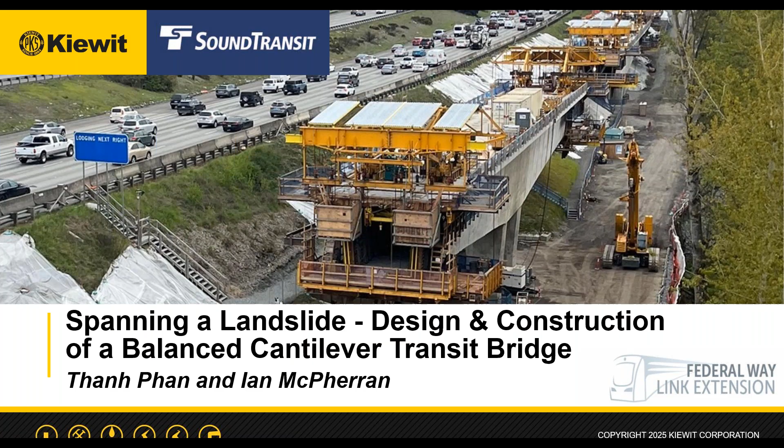For today's presentation, I'll start with the project overview, and then I'll put on my geotech hat and discuss the liquefiable soil that we had to contend with on this structure. I'll then go over a few alternate technical structure types that we investigated before landing on the long span structure itself. I'll then hand it over to Ian to cover the various aspects of what we called construction-driven design, and then we'll end the presentation with some time lapses and some photos.

So let's start with the project overview. The project is called the Federal Way Link Extension Project, or F200 for short. It is located in the greater Seattle metro area and is an extension of Sound Transit's existing regional light rail system. It starts where the line currently ends at Angle Lake Station, which is located just south of Seattle-Tacoma International Airport, for those who are not familiar with the area.

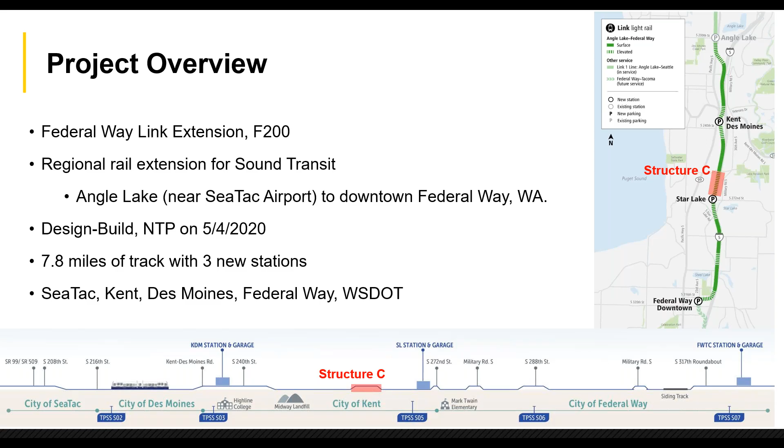The project has been delivered under the design build model. The line is approximately 7.8 miles long, and it runs mostly adjacent to Interstate 5 and terminates downtown Federal Way. This presentation will focus on Structure C itself, as highlighted in red right there. It's located in the city of Kent, and it's approximately in the middle of the alignment.

Zooming into Structure C there, the structure starts just north of South 259th Place, and the whole structure is approximately shy of 1,500 feet in length. The initial portion, which is approximately 400 feet, uses precast pre-stressed girders. The second portion, which is the focus of today's presentation, is the cast-in-place balanced cantilever structure. One thing I want to point out is the bridge, the structure itself, was designed by Kiewit Engineering, and the contractor was Kiewit Infrastructure. So Kiewit did everything.

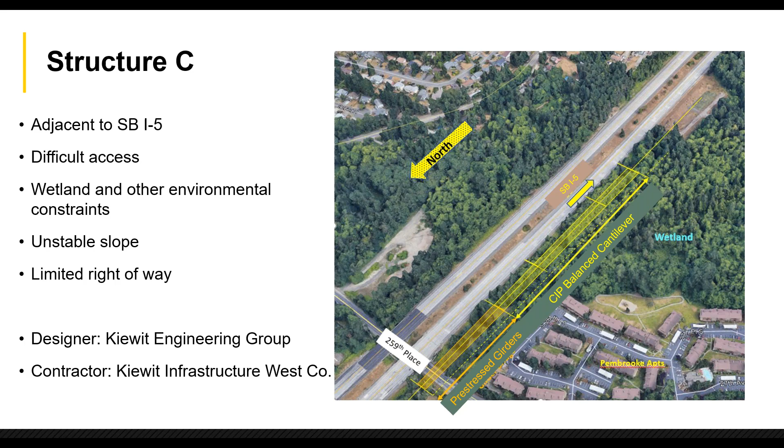So let's talk geotech for a little bit here. Taking a longitudinal section through the structure, we can see the main span is set to clear a liquefiable soil zone, which is that red layer that we're showing on the screen.

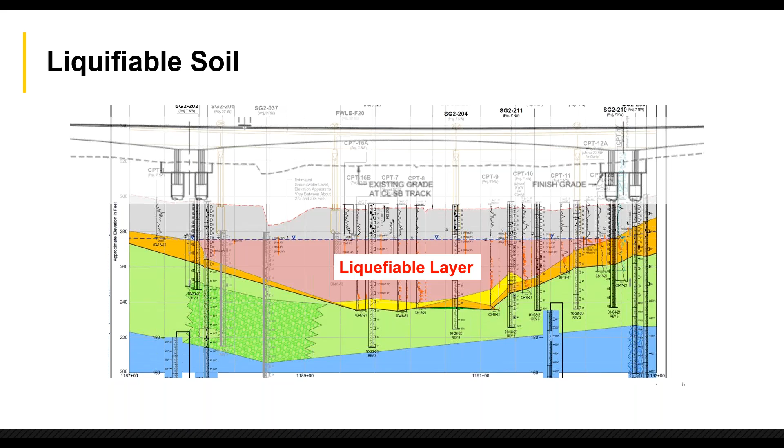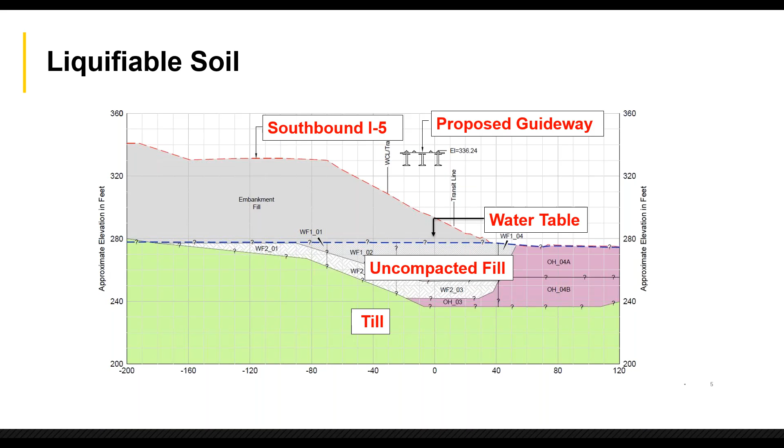Okay, so what? People put foundations in liquefiable soil all the time. So why do we need to span it? Taking a cross section through the zone, we can see the embankment on the left, which is holding up southbound Interstate 5. It's approximately 50 feet tall. The uncompacted fill layer underneath, which is the liquefiable zone shown previously, is very soft. And in an earthquake, this layer will liquefy and cause the embankment to slide downhill. In other words, we end up with a lateral spread event.

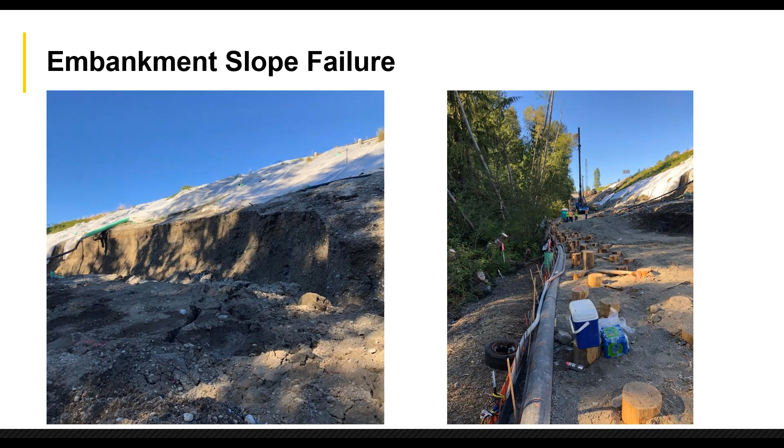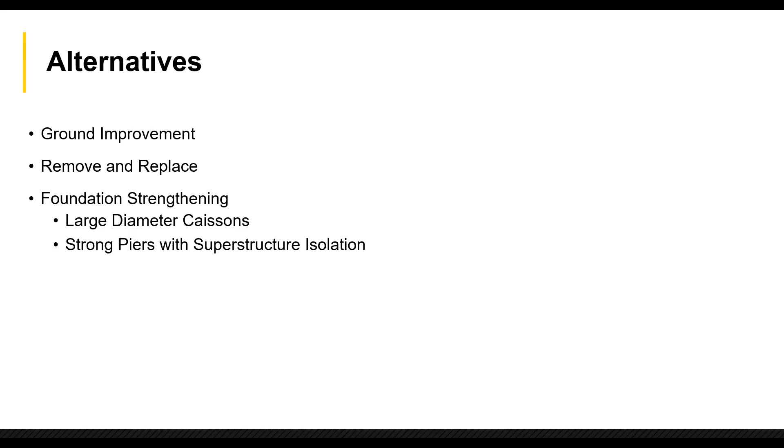So before landing on a long span structure, we investigated a few other alternates that I will go over in the next few slides. These alternates fall into three separate categories. First is to improve or strengthen the existing ground. The second is to remove and replace the uncompacted fill layer discussed earlier and replace it with competent material. The third was to make the foundation strong enough to resist flow demands. So I'll go over each one of these here in the next few slides.

For the ground improvement, soil strengthening was considered through either deep soil mixing or jet grouting. Either one of these techniques essentially pumps a cementitious slurry into the ground to strengthen it. This concept was ultimately abandoned due to various environmental and technical concerns. These techniques typically create a lot of spoil that must be contained. These spoils are full of cementitious fluid and other environmentally sensitive materials.

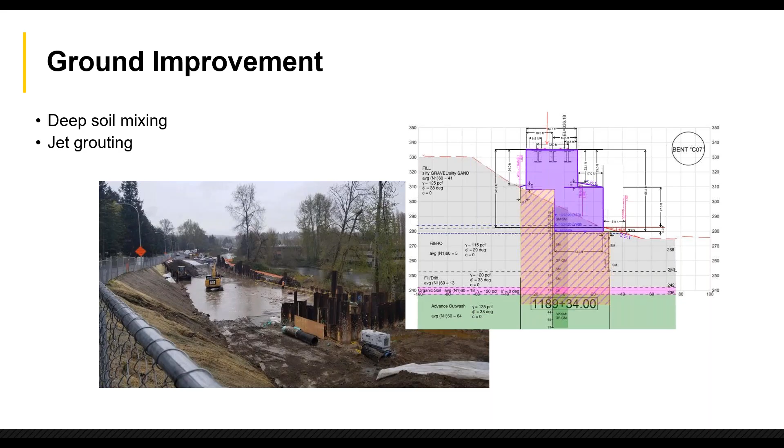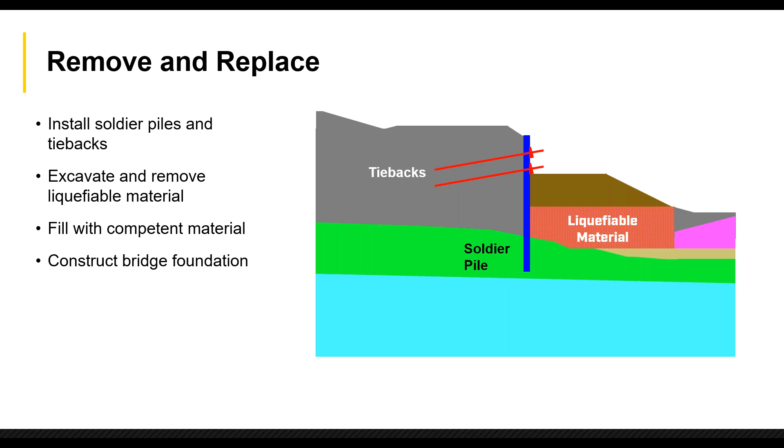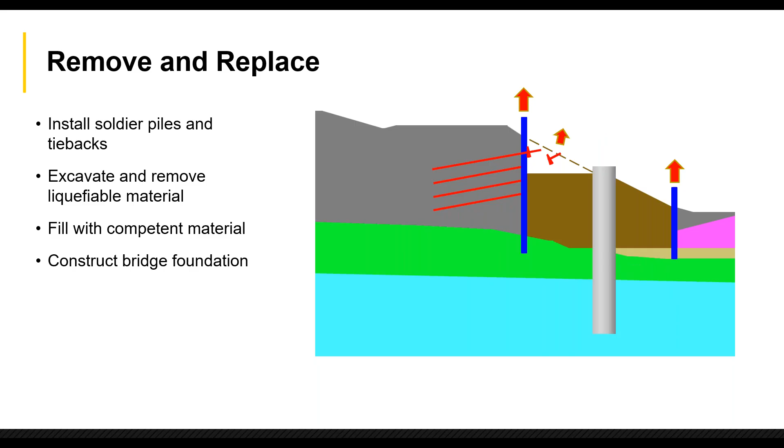So the next concept was to remove and replace. The idea was to excavate, remove the liquefiable soil material, and fill it back up with competent fill. First, soldier piles and tiebacks would be installed to temporarily support the existing embankment. Next, we would excavate out and remove the liquefiable material, then fill it back with competent fill to build a bridge foundation.

Taking a longitudinal section through this concept, these remove and replace zones would be approximately 250 to 300 feet apart. The structure type for this would have to be a steel plate girder of sort. This option was really abandoned due to the temporary excavation, and the construction zone having to be extended beyond the transitway limit or right-of-way limit into I-5.

This requires revision to the agreement and a host of other permitting challenges. Furthermore, this construction would require large cranes and big laydown areas. It's very challenging in a narrow right-of-way corridor with the existing slope. Shoring towers would be needed on the slope and would pose additional risk due to the soft embankment.

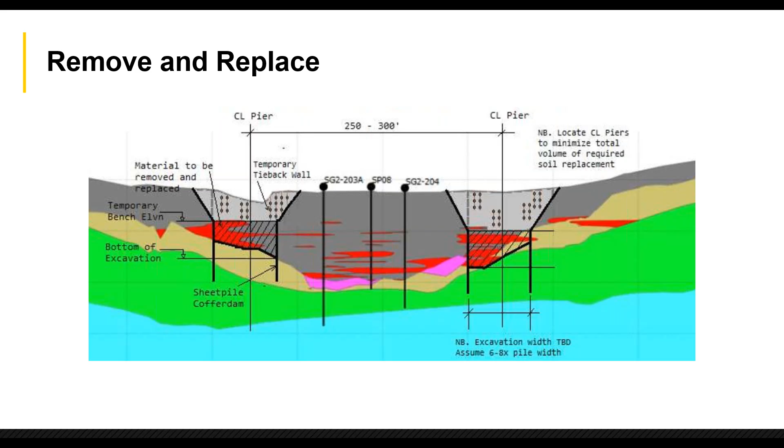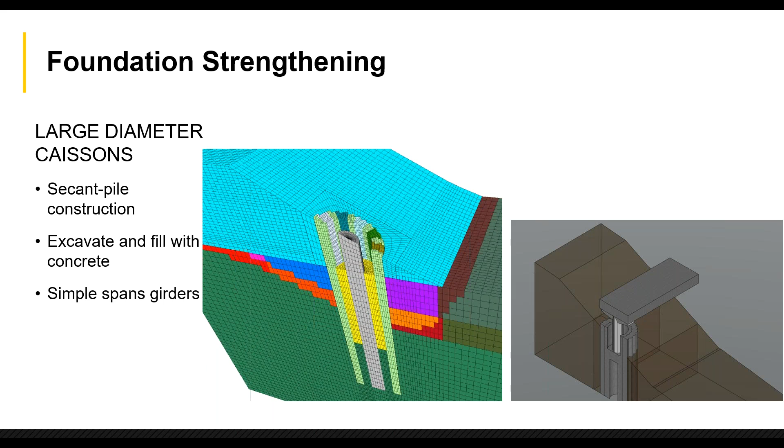Two of these piers would be placed inside the liquefiable soil zone with approximately 170-foot spans. This option was abandoned because the landslide load would grow with the large circular diameter, so you end up chasing your tail with larger demands and larger capacities. There are also a lot of construction risks with this - these secant piles would be very, very deep, and the shafts may wander as you build them.

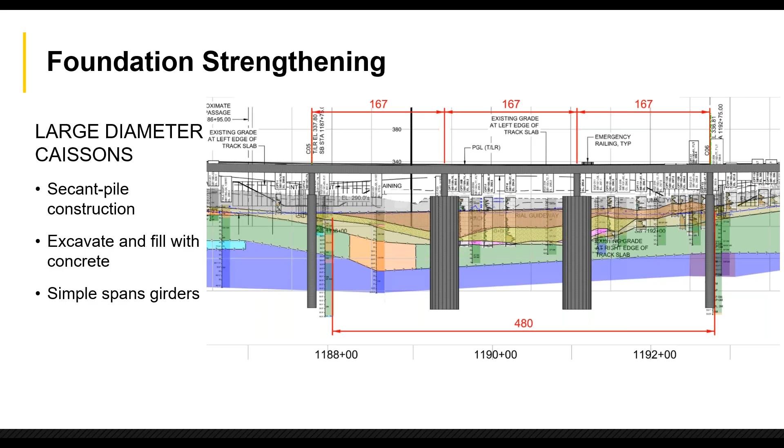We took the strong pier option through final design and released it for construction, but with other alternates it all goes back to the unstable slope. The equipment was mobilized to temporarily stabilize the slope to provide construction access, and the slope slid. The ground is simply too soft.

So when this happened, we, in coordination with Sound Transit, went back and took a step back to assess our options, and it was collectively determined that the long span balanced cantilever structure with top-down construction to span the slope was ultimately the right path forward.

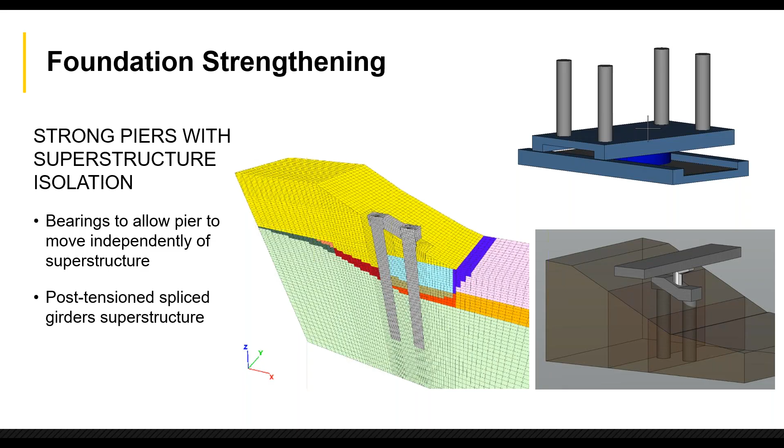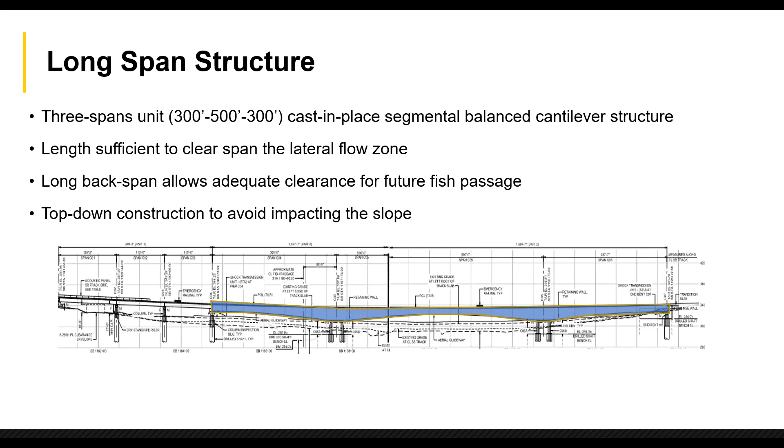So let's take a closer look at the detail of the structure. The segments are set to be 11.5 feet long for the deeper segments and 15.5 feet long for the shallower ones. These segment lengths were set on purpose based on the capacity of an existing set of form travelers that Kiewit already owns, which Ian will discuss a little bit later.

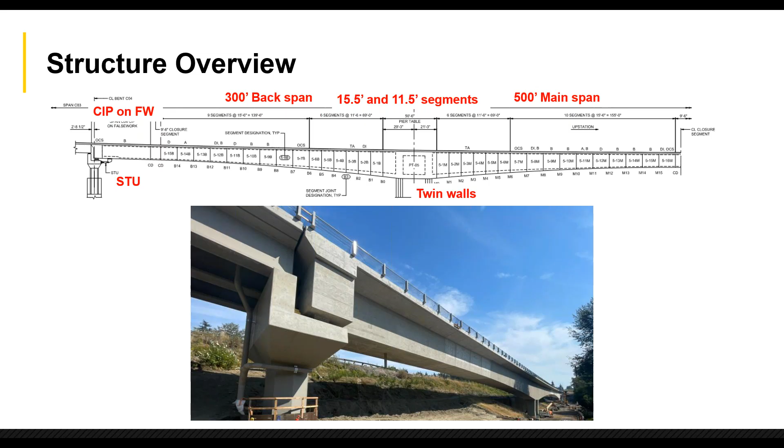At the two cantilevers, we use twin walls to address the out-of-balance moment with the half segment offset. The north column supports both the back span of the balanced cantilever and the last girder span. The south column supports a short jump span that takes the structure onto an MSE embankment. For seismic purposes, lock-up devices, or shock transmission units as we call them here, are used to engage the two end columns in an earthquake while allowing the bridge to expand and contract under thermal creep and shrinkage.

Looking at the section of the structure, the box is relatively narrow, just under 29 feet wide. It's designed to support 2 tracks with OCS in between the tracks. You can see the plethora of cantilever tendons there. The box is 25 feet tall at the pier and 12.5 feet tall at midspan.

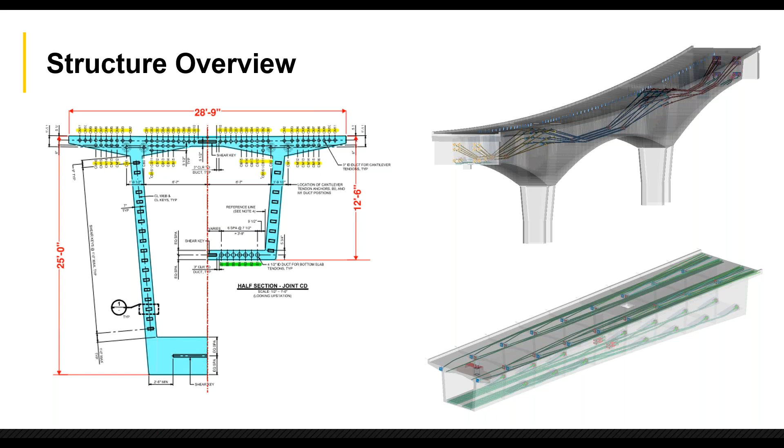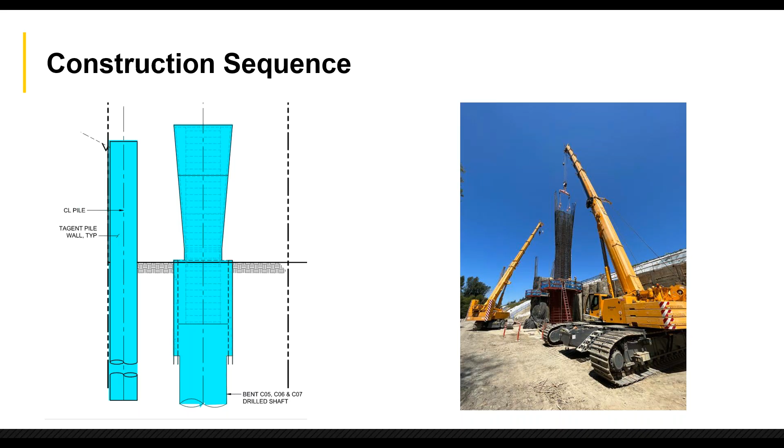The construction sequence for this structure is pretty typical to what one would see for a balanced cantilever structure. After site prep, the large tangent pile walls to hold back the embankment near the foundation are built, and substructure construction can begin. For the structure, we supported each blade column on a single large shaft. For this site, it was more advantageous to build larger but fewer foundations. This also eliminated the footing, like a shaft cap, that we simply didn't have room for. And the mono shafts provided the additional flexibility we need for seismic, given how low the structure is to the ground.

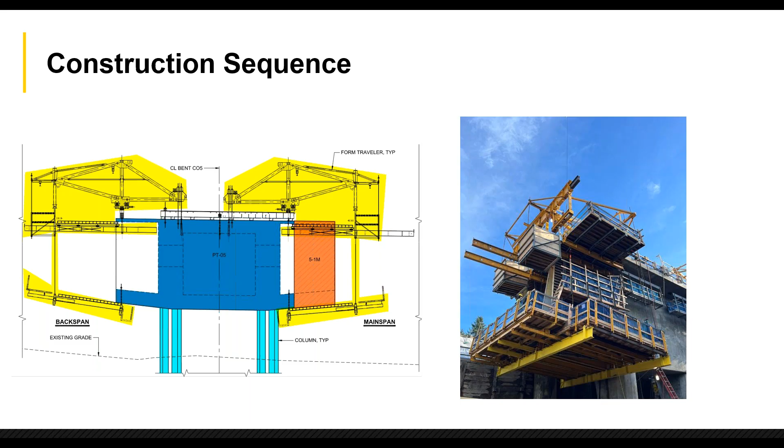After the columns are built, the pier tables are poured, and form travelers are erected to get ready for segment casting. Segments are cast in balanced cantilever fashion, alternating between backspan and mainspan.

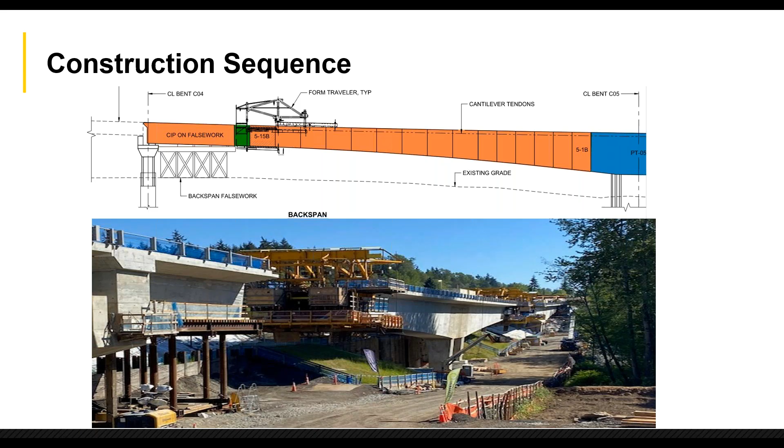For this project, we decided to make the backspan closure first. This provided the construction team with access from both the north and south side. After backspan closure, mainspan travelers are manipulated out of the way to make room for the mainspan closure itself. Prior to mainspan closure, we jacked the structure apart towards the target displacement. We calculated the force and monitored it in the field as we were doing the jacking operation. So after mainspan closure, the bridge was ready for track and systems and other related activities, and then the STUs are also installed.

So with that, I'll hand it over to Ian to discuss our approach of construction-driven design.

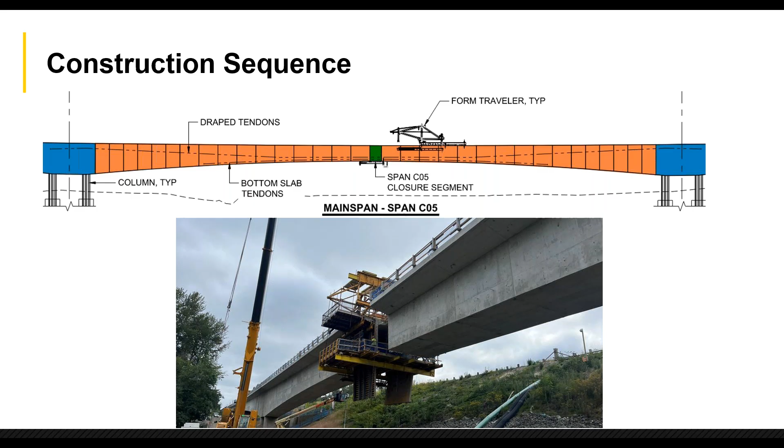Thanks, Thanh. So I'm going to spend the second half of the session talking about the integration of our design team, the KIE team, and our construction team throughout the whole process. Along the way, I'll give several examples that highlight the work getting built.

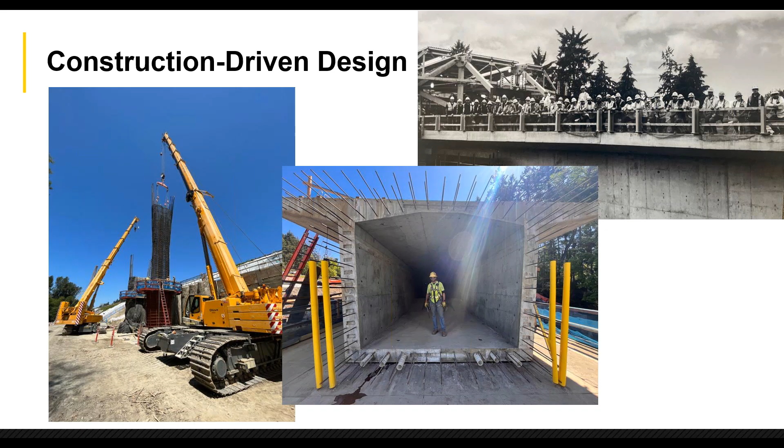As Thanh mentioned, we consider this a construction-driven design, basically a progressive design-build approach. This was a design-build project, but there was a change in the middle of it, and it became progressive, where we had to advance design and keep construction going. This project delivery method is becoming more popular in the industry, and just recently living it, we really saw a lot of success in the design and build-out of this bridge. We're going to cover several aspects of that.

On the erection manual, nothing earth-shattering here. It's the first place we started with. The phase shown on the slide, for example, is what Thanh's group developed for the drawings, and then we advanced that with the erection manual, authored by McNary Bergeron. It gives the specific steps to set up and secure the form traveler, gave us our survey and geometry control steps, and also incorporated all the wait durations and strength requirements for tendon stressing and form stripping. With that theme in mind, we started this really early and engaged McNary and KIE all working together at the 30% design stage, with a draft erection manual that we kept advancing. This engaged everyone early and helped shape both the bridge design and a lot of the temporary structures we're going to talk about.

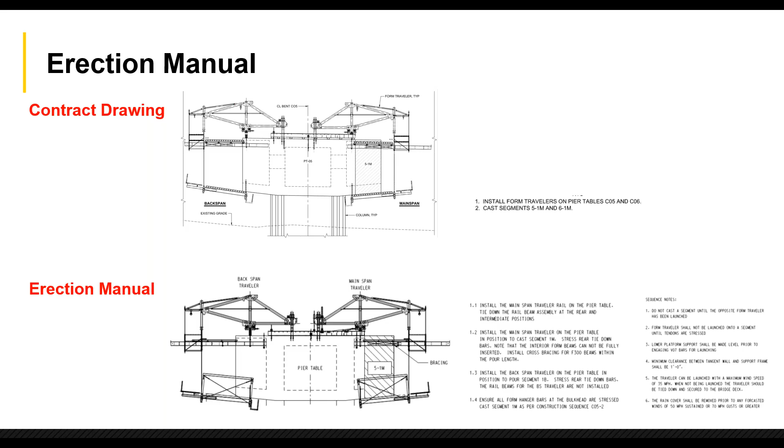One of the most significant efforts we spent integrating design and construction was the choice on the project to do integrated shop drawings for the whole segmental bridge. These weren't required by project specs, but we elected to produce them as a means to ensure construction success. We were under extreme schedule pressures, and we wanted to do as much as we could in advance of construction starting to vet out all the problems. Looking back, this really paid off in all the ways we wanted, and also a bunch of unanticipated benefits.

This started with pulling up an old example that IBT had done from the SR 520 floating bridge segmental work. We used that as a template from the last time we'd seen it done, and then innovated a little on what the whole team wanted to see.

We had the rebar supplier and the post-tensioning supplier on board, and brainstormed what all we wanted in these integrated shop drawings, what was the purpose. The goal we all set was to have each segment include a single 2D package with literally every piece of information you needed to build the segment, all in one work pack, like a 12-page pack to build that one single segment.

This included all the concrete dimensions so we could lay out all the formwork, all of the rebar information, bar lists, bend diagrams, all of the post-tensioning duct callouts and sweeps and inflection points, all of the stressing data right there, anticipated elongations, all the different layouts for embeds, traveler sleeves, rail embeds for the plinths, everything for handrail embeds, things for the closure, all of that. What that equaled was about 68 separate packages for all the different segments plus the pier tables.

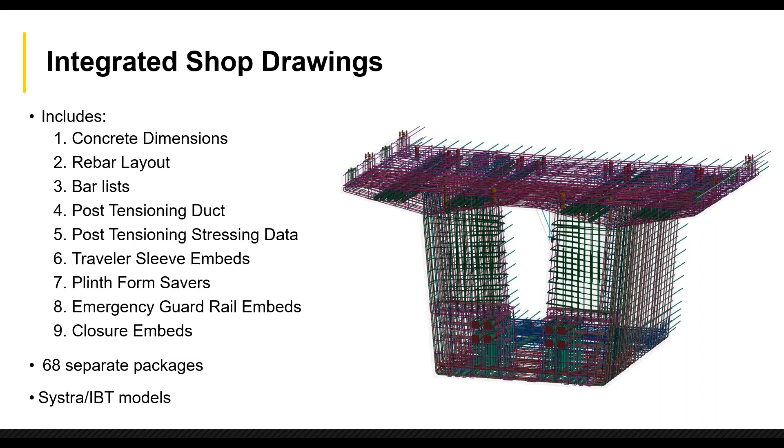The detailing accuracy was about an 1/8 inch or better, which is higher than, say, rebar tolerance for fabrication or placement.

People had the old assumption that, well, it works on paper, it works in a 3D model, but it's never going to work in the field. We found quite the opposite with the modeling that was done. We really came to trust that if the model was conflict-free, everything would fit, and we really saw that out in the field, with everybody having the same set of drawings. I think it's a testament to the modeling that was done, and really truly chasing down every single conflict.

If we did find conflicts that existed, in many cases it was found that the work wasn't built right. It wasn't that the model or the drawings were wrong - it was something that had been layered incorrectly, or some rebar that had been bent not quite right, and that was the issue versus the actual drawing set.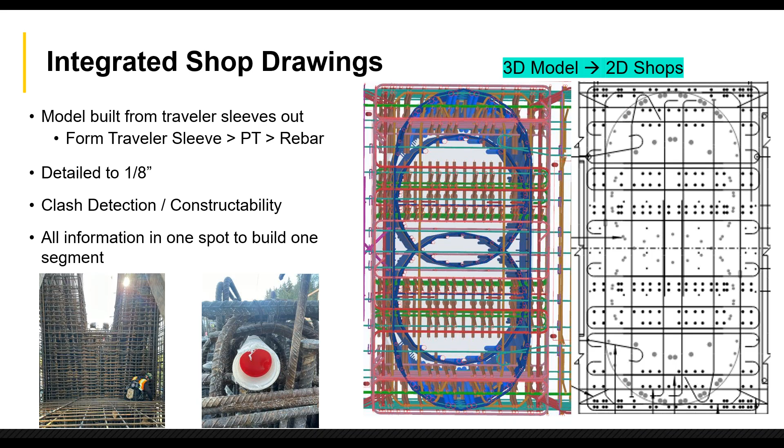These are just more examples of the 2D drawings that were produced - really easy, clean packages with all the information. Top left would be concrete dimensions, the bar lists are in there, all the PT information on the right. Again, everything in one spot for everyone to be able to use, and a really great record for the end of the project.

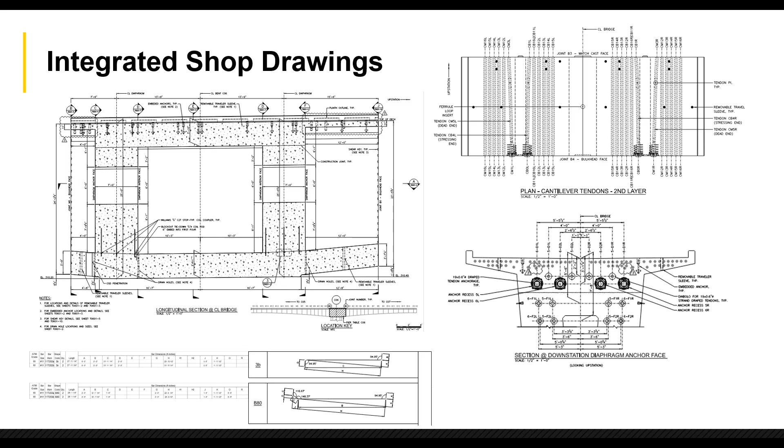After integrated shop drawings, the second most significant effort integrating the design and construction team was all the temporary works involved in the long span bridge. Typically these don't involve the permanent bridge designer, and might be done after the fact once the bridge is designed. On this technical bridge and under our schedule, the permanent designer's involvement was really critical, and it helped the success of all the temp structures working the way we wanted.

We teamed with 6 different design firms to help spread the load and get expertise in each area. The design firms included McNary Bergeron, SMG, and some others I'll mention.

Looking at the list, the big ones were falsework and formwork, equipment and access roads, and the closure jacking Thanh mentioned, all with engineered jacking beams. Our big shaft cages needed significant rebar stability checks, plus critical crane picks and worker access considerations. Many of these designers came on site or spent time inspecting their work as it was built, making sure it followed the design and helped fast track readiness for the next phase.

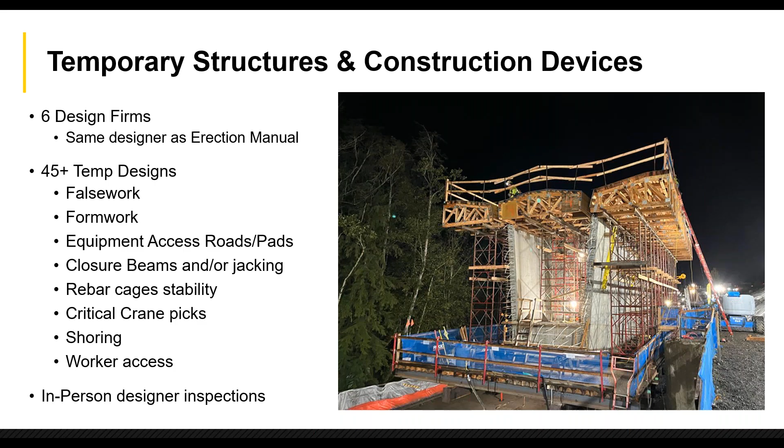Similar to the integrated shop drawings, we started all these temp designs really early. Almost every single one of them started before the permanent design was even stamped.

The very first temporary design started, and the most important, was the formwork travelers. This actually began during the conceptual design phase of the bridge. Thanh needed the traveler loading to start some early construction sequencing in their models, so we teamed with McNary Bergeron to design the formwork traveler.

For the history folks on the call, this formwork traveler was not new. Kiewit purchased it back in 2011 from an East Coast contractor, and we used it on the Tillicum Crossing in Portland, Oregon, a cable stay cast-in-place segmental bridge. Following that project, these travelers went to Hawaii and constructed many miles of segmental transit guideways on the Farrington and Kamehameha projects for HART. After those projects, they were brought back to Washington and made available for this project.

For the long span, McNary basically recreated and rechecked the old Parkin engineering design for these travelers, then identified a bunch of unique modifications needed for them to work on our segments. The travelers also had a lot of wear and tear from years of use, so we did quite a bit of assessment and repairs in the shop to get them ready.

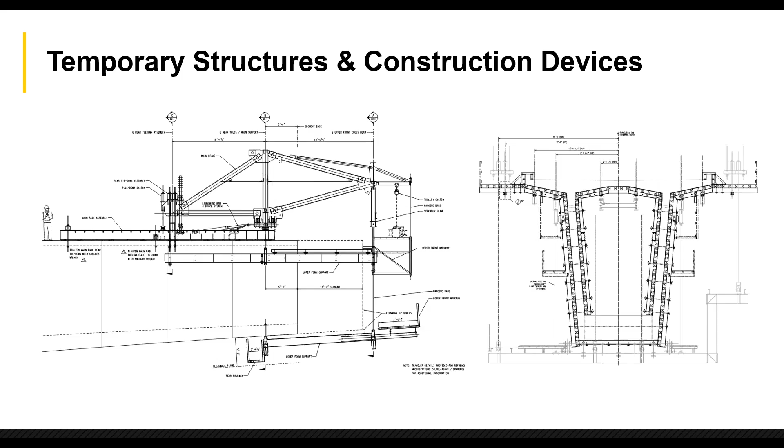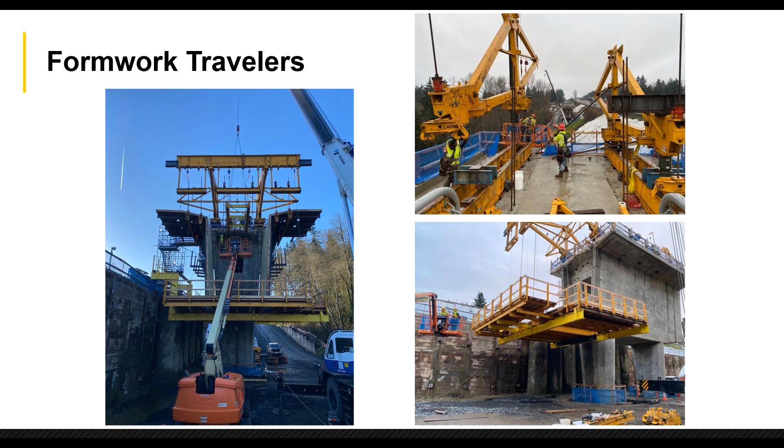Thanh highlighted in the early photos that the site was built in a really narrow footprint, wetland on one side and the freeway on the other. The integrated team strived to develop one temporary access concept that would work for all phases of construction, so the same access worked for drilled shafts as we ultimately needed for removing the formwork travelers. Kiewit designed an extensive system of soldier pile and lagging walls cut into the hillside by the freeway, plus Hilfiker wire basket walls along the wetland border, providing a 30-foot wide road along the whole side of the bridge. We also had pockets in the hillside at each of the piers.

These were really risky temporary designs given the poor soil conditions Thanh highlighted. As Thanh noted, we utilized timber piles in sections where we had the really heavy drilled shaft crawler crane loads.

Ultimately very successful, this access worked for everyone involved. It was really the premium, easiest way to get to work on all points of the work.

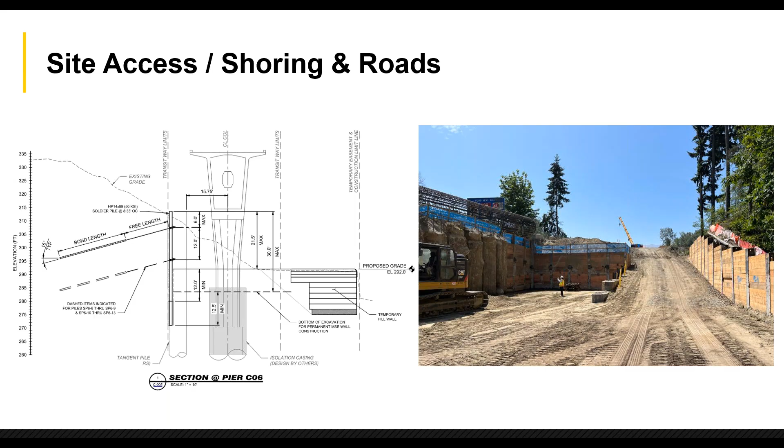Ultimately all these elements were removed and the hillside was restored to a landscaped embankment that you'll see at the end.

One of the biggest falsework systems we utilized was for the pier table, supporting the bottom and then all the formwork for the walls and the top. This was designed by McNary, and to overcome the poor soil conditions right on the outskirts of these pier tables, we collaborated on a falsework system supported on top of the permanent drilled shafts with steel posts that basically hugged onto the columns. A big network of steel grillage was utilized off these posts to cantilever, create a dance floor, and fill in that pocket in the hillside. We provided our access and then support for all the formwork to cast the pier tables in 3 different stages.

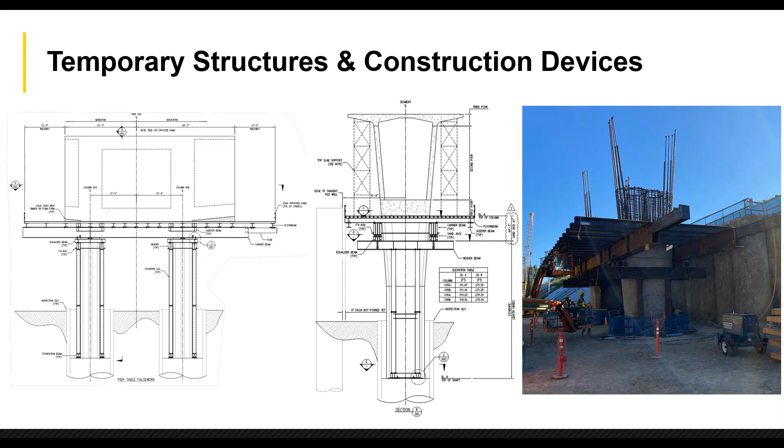In addition to authoring the erection manual, McNary also authored the bridge geometry control manual. This manual identifies and numbers the several hundred different phases of segment casting used to track and control geometry of the bridge during the build, and identifies physical target points for each segment. In total, we tracked about 248 phases from the end of column construction all the way through the closure.

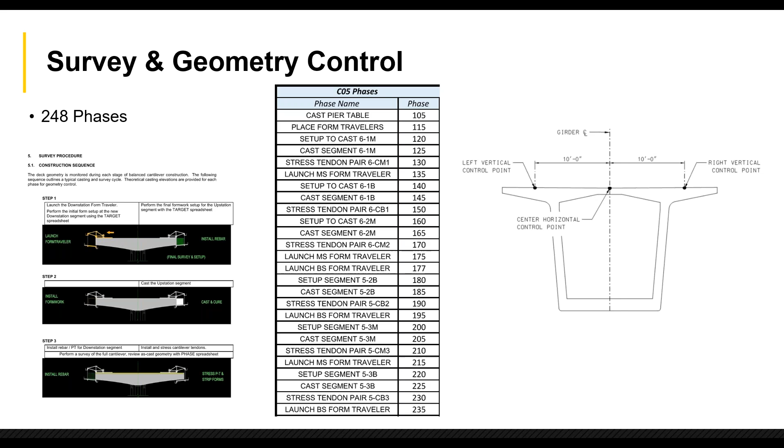The bridge geometry was recorded basically every single day during segment casting. We were casting 1 to 2 segments a week. We called the early morning surveys globals, as the surveyors with total stations would collect as-built data, station, offset, elevation across every single segment across the whole cantilever. The control points were survey nails installed in the leading edge.

We had a full-time Kiewit engineering group designer who managed the survey schedule, all the data input, and coordinated with McNary in real time to look at the results and set up the targets for the next segment. Overall, our casting accuracy to the base design was really well tracked, some of the best we've seen in terms of per spec from our experience on segmental work.

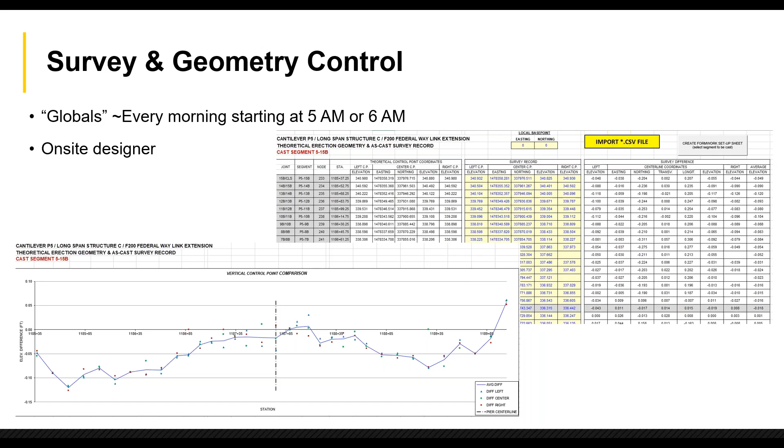Jumping topics, on the theme of starting early and overlapping with design was the mix design development for concrete. We started this about 14 months ahead of construction, right when the design was starting. Our internal Kiewit engineering group began developing different mix designs working with local suppliers. Our target mix segment strength was 8,000 PSI at 90 days for the permanent design, but our construction schedule was built around the mix's early strength gains. So we were targeting to achieve 3,500 PSI in 18 hours. That was the goal we started with.

Besides those two criteria, we also needed a mix that met or exceeded a 100-year design life for durability. Trying to chase after that perfect mix, we lab trialed about 15 mix designs with Corliss, our concrete supplier, then truck trialed about 7 of those, and finally narrowed it down to 2 different mixes. One was a type 1L and one was a type 3, both approved for use on the project. Primarily the 1L was used for all the segment casting.

Ultimately, we achieved our goal, getting a really consistent 3,500 PSI in 18 hours, which allowed us to proceed with stressing the post-tensioning and then moving the traveler. So overall, huge success. Our mix design did not let us down in terms of our tight schedule.

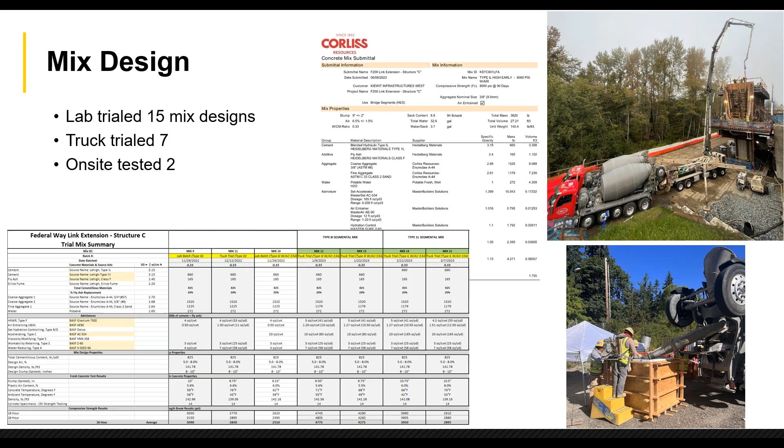Along the same themes, the concrete is the thermal control that goes with it. Our same group does some great modeling to look at this. With this high performing, high early strength concrete mix came a ton of heat generation during the curing process.

The team developed a bunch of models and looked at the different segment pours, especially the pier tables with some really thick elements on the slabs and diaphragms. These looked at varying insulation on the formwork, varying ambient temps, different concrete delivery temps, all modeling to see where we were versus the spec required max heat, which was 185 degrees. Many of the models predicted we would come dangerously close or exceed that max.

So we started with modeling the introduction of cooling tubes, cold water cooling tubes throughout the pours. To implement this in the field, we put together a cold water system consisting of an industrial water chiller, a big reservoir tank, a big pump, and a network of manifolds with clear PEX pipe running in a grid pattern.

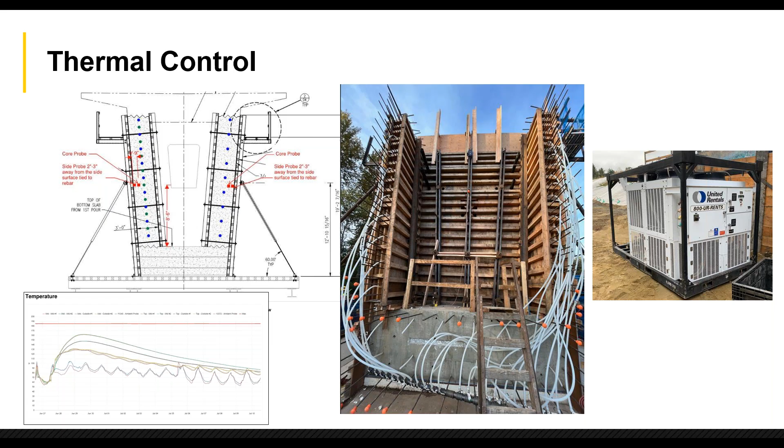The graph illustrates an output from the exact system we used for thermal tracking. Several days of the cure period where you can see the concrete peak and then cool, staying below our max temps with use of the cooling system.

Unlike many projects that get designed with a generic PT system, we selected Schwager Davis early on to get maximum input and efficiency on the design and jumpstart all the integrated shop drawing work. This worked really well in terms of having all their CAD files, knowing all the materials, having all the exact specific dimensions to run everything and come up with a conflict-free segment design.

Many unique details were developed along the way to lead to successful PT installation, down to details like where we routed the grout tubes, which in this case were routed up into the bridge curbs, really helping prevent water from getting in the ducts during construction.

One additional collaboration element was that the EOR Thanh's group performed the tendon elongation calculations, something that may typically be assigned to the PT supplier. Thanh's group used the Midas models to output the elongations, McNary used their model for the erection manual, and then SDI reviewed and did a second check.

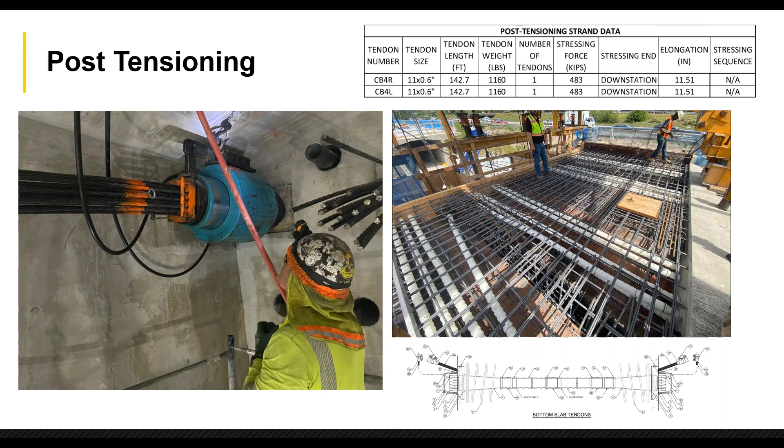The final proof of the integrated design and construction, and the final big lift, was the segmental closures that Thanh mentioned. These had really tricky phasing and staging of every single task - lots of temporary works, formwork, jacking beams, portions of the traveler remaining behind, permanent design assumptions for all the alignment forces, and finally all the continuity tendons and bottom slab PT stressing had to be sequenced and done perfectly.

We really started this closure planning back in the design phase. We optimized it several different times, saw issues where it was going to mess with our schedule, and changed it several different times, ultimately finding a pretty good solution.

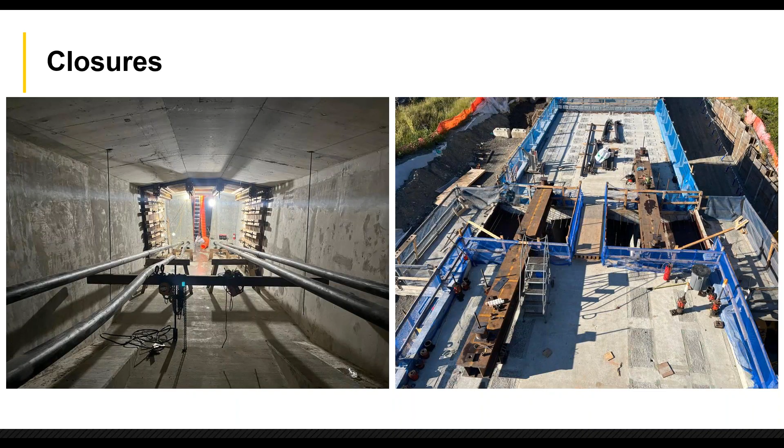I've said it a bunch of times now, that design integrated with construction, and it sounds great. It sounds like it could probably happen remotely in today's market, but what really made it a success here was that it happened with a ton of folks on site at the bridge. We had a lot of design folks there day to day, from geotech engineers viewing all the drilling operations, to staff supporting the superstructure rebar, the PT, and geometry control. We basically had designer presence on site the whole time.

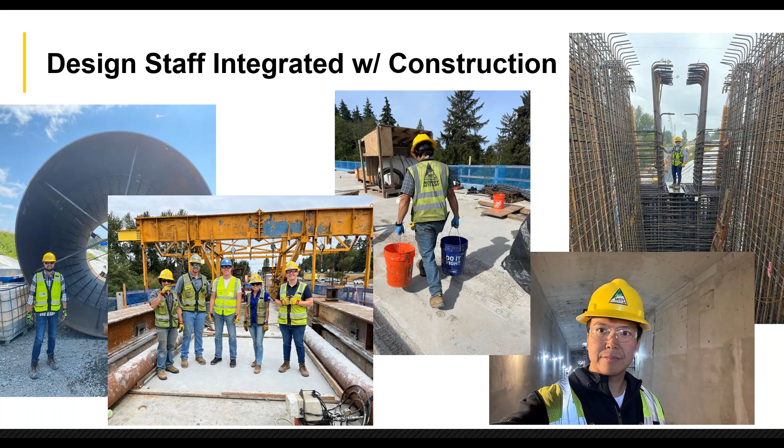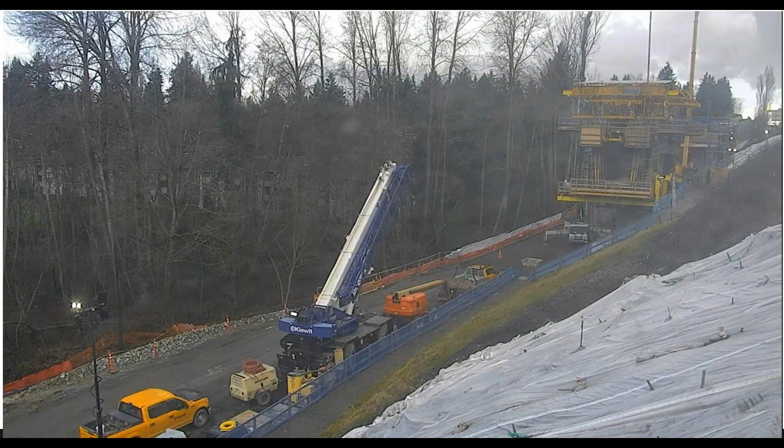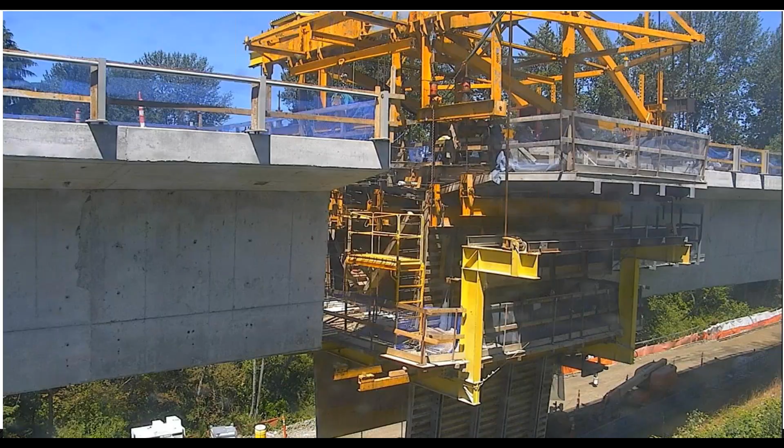We have two time-lapse videos for you guys. This is of the pier table completed with the traveler erected. It jumps out towards the mid-span closure, then one of the travelers coming off and the mid-span closure being cast.

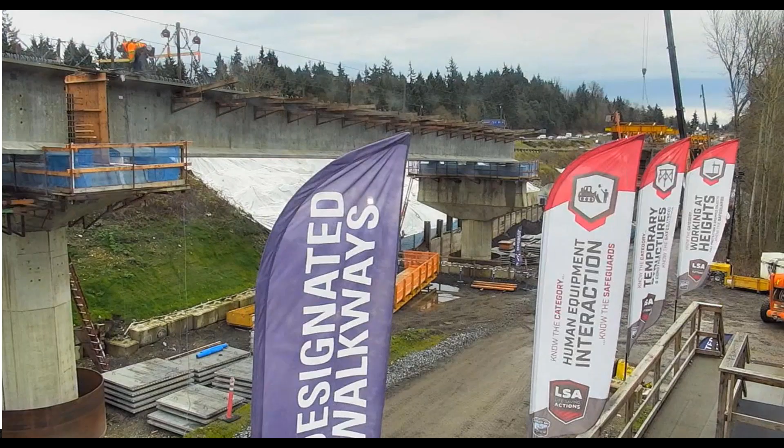And then this is a video that starts with some of the pier tables again from a different perspective. It shows the backspan being cast, a small section that we didn't talk about that was cast on false work, and then ultimately the backspan closure occurring before the midspan.

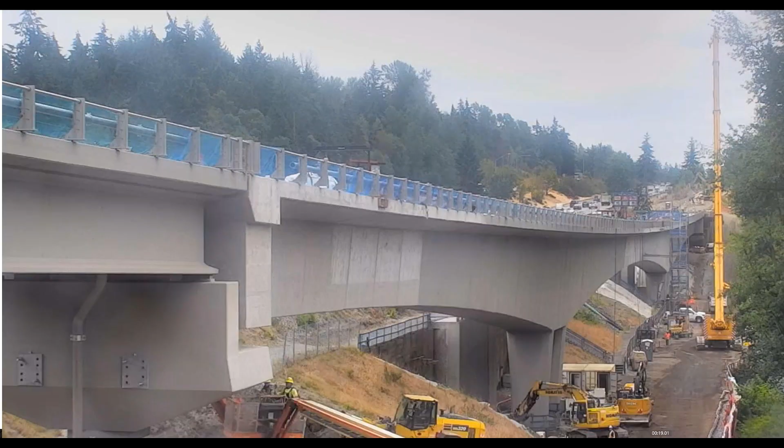Overall, really challenging project with all the changes that Thanh talked about, all the geotechnical risks and setbacks that we had — really had a lot of problems to overcome. But the selection of the long span, and the integration of the whole design team, construction team, everything we mentioned on all those topics, ended up allowing us to finish the project actually several months early, and finishing within budget. So overall, kind of a success across the board. We're happy we got a chance to talk about it.

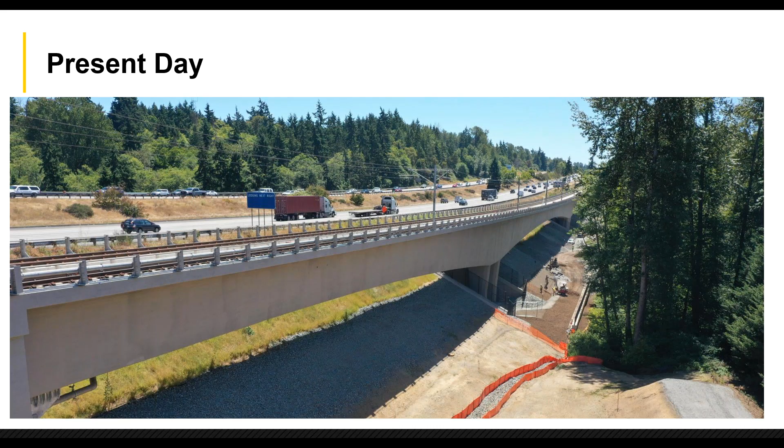That's it. We'll open up for questions.

All right, thank you, Wade. Okay, great. I'll ask you to step in. Yeah.

Absolutely. Thank you, Ian. Thank you, Thanh. Good presentation, really interesting project — kind of a unique usage of segmental technology. Got a variety of questions here, so we'll just start going through these.

With the number of cantilever tendon ducts in the top deck, how was the interaction taken care of with the anchorages, for track plinths and all the sort of light rail track hardware and stuff?

Thanh, you want to take that one? Yeah, sure. So what we did is we actually used form savers that are cast with the segments, and those are anchored in the slab. We detailed and located all of those for the plinths with the integrated shops. And then after everything is built, we came back and essentially installed a splice bar into those form savers and bent them into place to provide the proper bar for the plinths. So no post-install of anything.